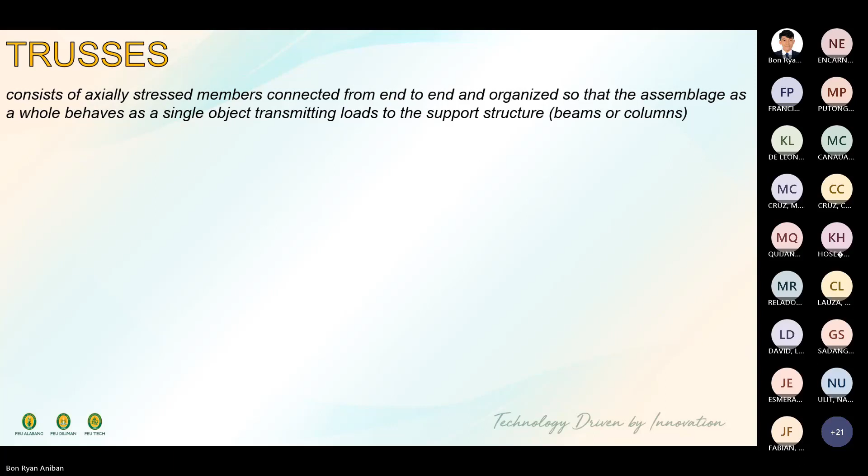Today we'll be discussing trusses. A truss consists of axially stressed members connected from end to end and organized so that the assemblage as a whole behaves as a single object, transmitting the loads to the support structure. It's either beams or columns.

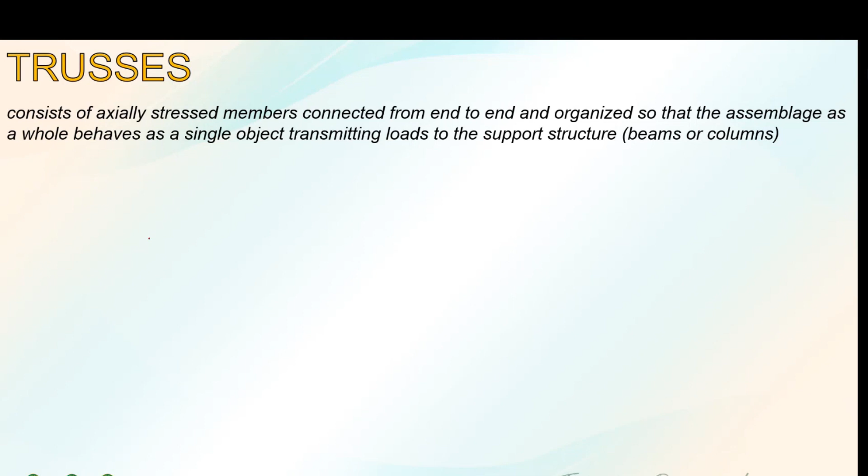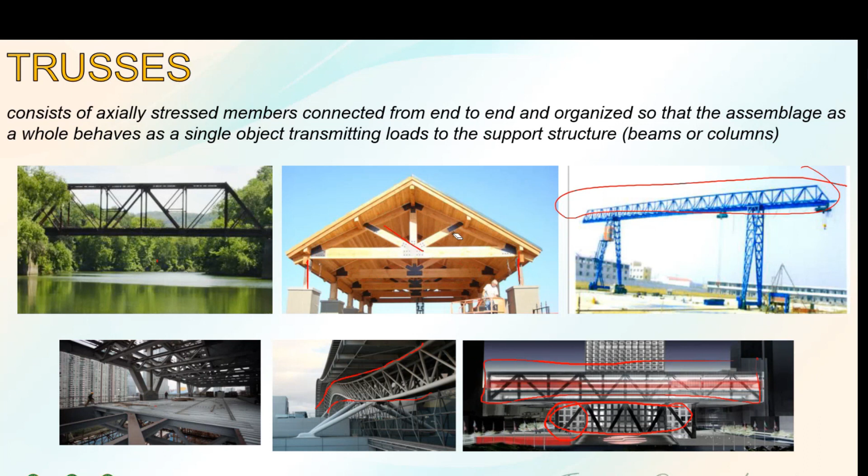Meaning, we are analyzing the truss with the load only doon sa mga joint. Dyan lang nag-a-act yung mga forces, sa mga joint lang. So, wala tayo ditong uniform load, walang distributed load. So, purely concentrated lang, acting on every joint. So, that's how we analyze trusses. Concentrated load lang.

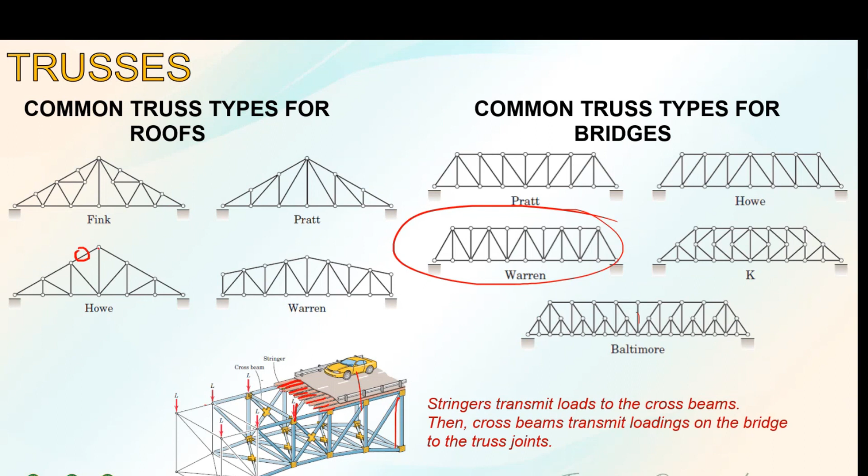However, a compressive force is directed towards the joint. Towards the joint yung direction ng force. It causes shortening of the member. Okay, tandaan na papunta lagi sa joint yung force.

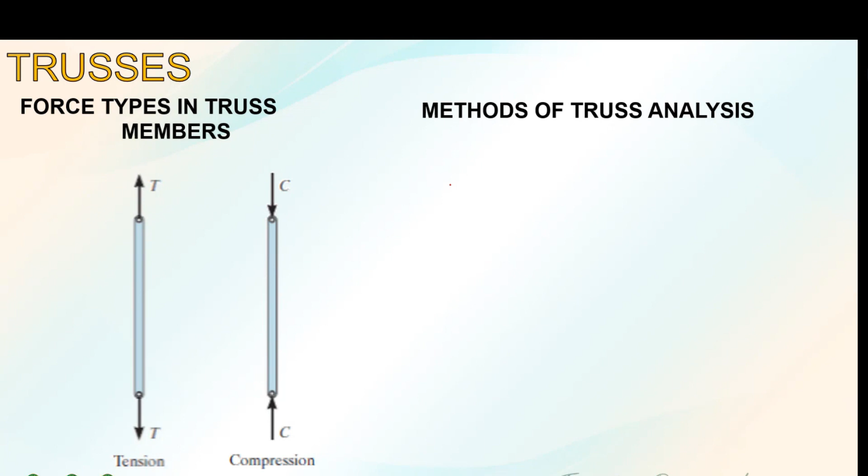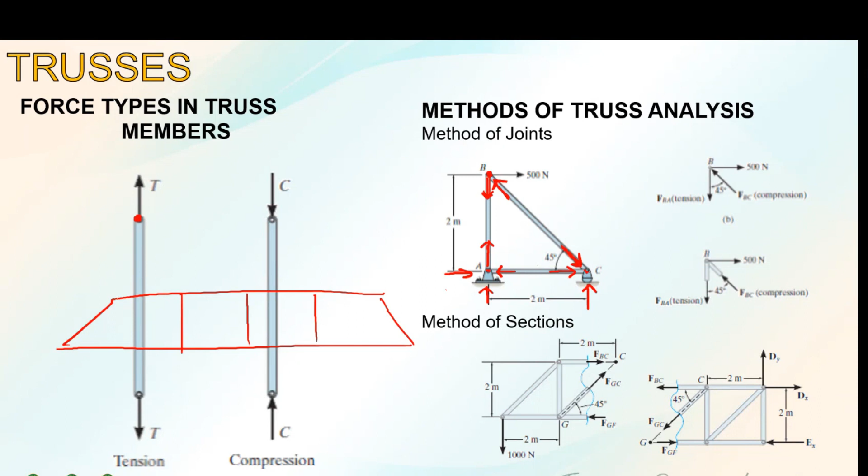We also have a method of sections. So method of sections, you are cutting the section. Let's say you have here a very long truss. So what's the purpose of method of sections? Method of joints will allow you to solve all member forces. Halimbawa, you want to identify member BC, member AB, and member AC. Kasi lahat ng joint ay dadaanan mo.

Okay, however, if you only want to solve a certain member, for example, ito lang ang gusto mo ma-solve, what you are going to do is cut the section along that. Ayan, ikakat mo yun. Kung saan ka nag-cut, yun lang yung mga lalabas na forces. Let's say dito ka lang nag-cut, ito lang yung mga lalabas na forces. You assume, so ganito naman, class, yung direction ng tension or compression. Let's say this is the cutting section.

If the force is away from the cutting section, so doon ka nakatingin sa cutting section, class, that is a tension. If the force is away from the cutting section, this is also a tension. If the force is towards the cutting section, that is a compressive force. So we have two methods to analyze the member forces on each member. But we will only focus on method of joints. So method of joints lang tayo mag-focus muna for this meeting.

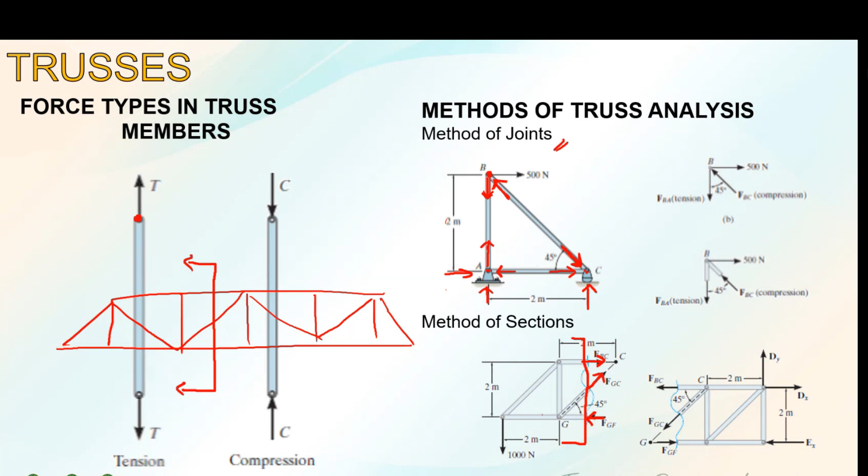Therefore, kapag pinat mo yan dyan, sa point na yan, walang moment. So end-to-end walang moment. Kung end-to-end ng bakal mo ay walang moment, walang moment dito, therefore yung buong length niya ay wala ring moment. Walang moment din itong bakal na to. As you try to cut the section, no moment acts at the end supports. It only consists entirely of two-force members. Hence, the members are always axially loaded. It only consists of two forces, vertical and horizontal component.

However, hindi tayo ganyan mag-analyze sa trusses. Dapat member forces. Gagamitin natin yung resultant. Yung resultant ng vertical at horizontal component is acting parallel doon mismo sa member. Andito yung mga forces natin. So, the force is only acting along the length of the member. They might be tension or compression. So, it can contain zero force members. Possible yung ina-analyze natin ay zero force member, walang load na kinukuha. Halimbawa ito, walang load, zero lang yung force dyan.

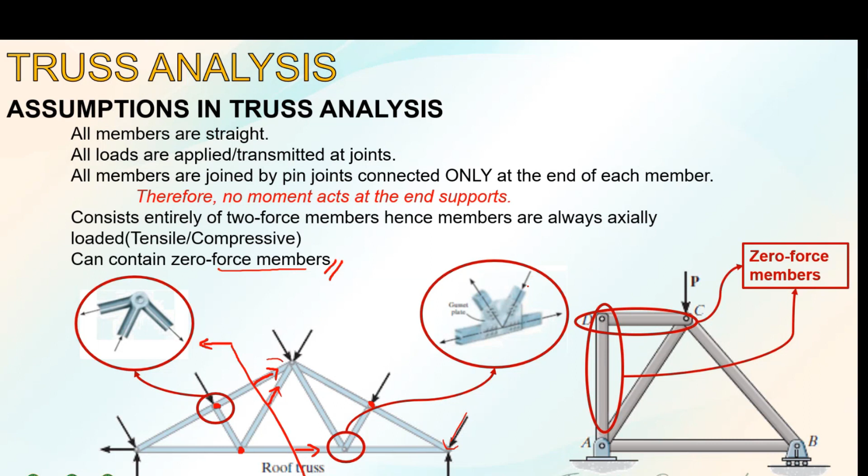So, paano natin malalaman? Without solving, malalaman natin, class, yung zero force member by just looking at the structure. Dito sa figure na to, itong dalawa tsaka ito are zero force members. So paano kaya nalaman yan? And then what's the purpose of identifying which are zero force members? Ano ba yung purpose nun?

Ang purpose ng zero force member, class, is to reduce the number of unknowns. For example, we want to identify all of the member forces. Ano yung member force ni AB? Ni AF? Alamin natin yan. Instead of solving all of those member forces, just look at our structure. Baka may zero force member, automatic alam mo na agad yung sagot, zero. Halimbawa, determine the member force EF. Kung zero force member siya, zero na sagot mo. So can we identify that? Zero force member: two members meeting at an unloaded joint. Joint ang tawag natin dito, class.

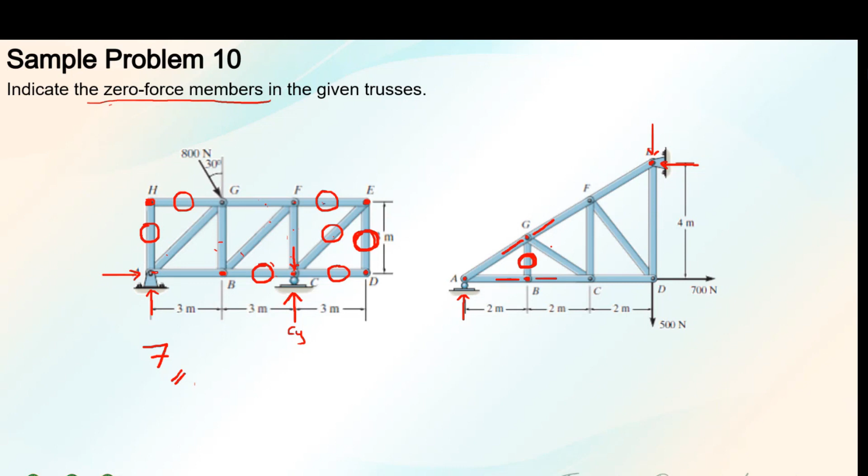Asan pa yung mga collinear? Okay, may collinear din dito class. Itong force GA and force GF. Since itong third member niya ay pangatlo na siya, hindi na pang-apat, dahil zero na ito. So, parang wala lang tong GB. Okay, we can just treat it equal to zero.

Okay, so at joint G, tatlo na lang ang nakakonect dyan. Okay, so ito na lang ang nakakonect dyan. Isa, dalawa, tatlo. However, this is collinear. These forces are collinear, therefore, zero na ito.

At joint C tayo, at joint C. May collinear ulit, at may third member na nakakonect. Therefore, yung third member na yun is zero na. At joint F, may collinear ulit. Okay, yung third member, zero na yon.

Okay, so joint E kaya. Meron tong force dito, so wala tayong masi-zero dyan. Even point A, wala diyang masi-zero, may dalawang nakakonect. Even point D, wala na rin diyang masi-zero. Pero ito zero na ito kanina. So, zero rin yan dito sa D. Okay, kung zero siya dito, zero rin yan dito. And for this, meron lang tayong apat na zero force members.

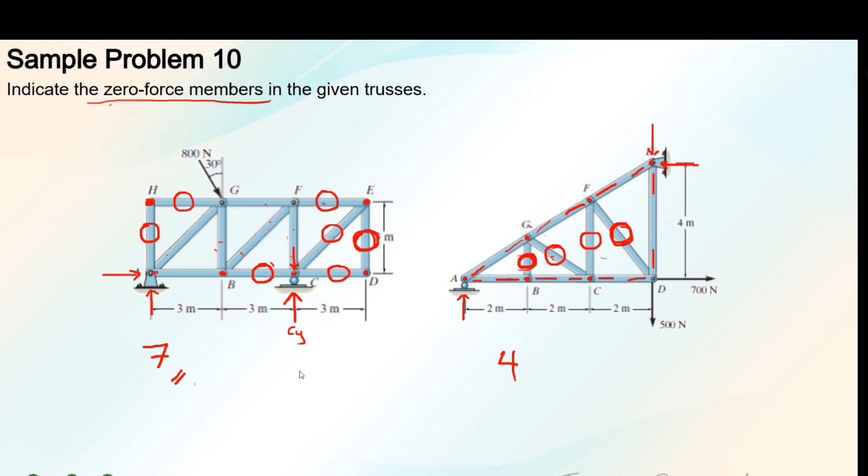Hindi man natin mag-analysis, no? We will first discuss yung mga first thing to do bago kayo mag-analyze. Una, dapat alam mo yung mga zero force member, and aside from that, you know the degree of indeterminacy or the statical determinacy of the trusses. So what do we mean by statical determinacy? Remember, nung nag-solve tayo ng beams, meron tayong cases kung saan dapat yung number of unknowns natin ay hanggang 3 lang kasi meron lang tayong 3 equilibrium equations.

Dapat 3 lang yung maximum unknown. Same din yan sa trusses. Okay? We can check kung kaya nating ma-solve yan. Kasi pagka sobrang dami ng unknown, even sa 3 equilibrium equations, we cannot solve yung support reactions sa trusses. Same thing doon sa trusses, no? If sobrang dami ng unknown, we cannot solve. So, paano natin malalaman kung solvable ba yung trusses na ibibigay sa atin?

So, we have 3 cases here. First is unstable, meaning magko-collapse yung structure, guguho. Indeterminate, stable ito, stable yung structure. However, sobrang dami ng unknown. Stable pa rin ito, determinate, pero...

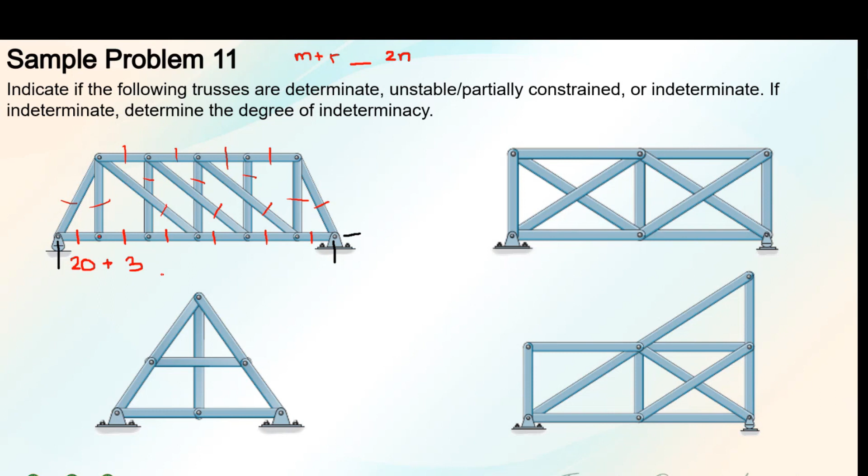Then we are going to compare that with 2 times the number of joints. Ilan ba yung joints? Kasama yung kung nasaan yung support. 1 to 12. Kung nasaan yung connections, those are joints. So we have a total of 12 joints.

And obviously, this is 23 less than 24. Therefore, this is what type of structure? That is unstable structure. Pag less than, unstable ang structure natin.

How about this one? Okay, let's try to solve this. Let's count the number of members. 1 to 8 members lang siya, kasi ito isa lang bilang isa lang din bilang nito. So 8 members, 8 plus the number of reactions.

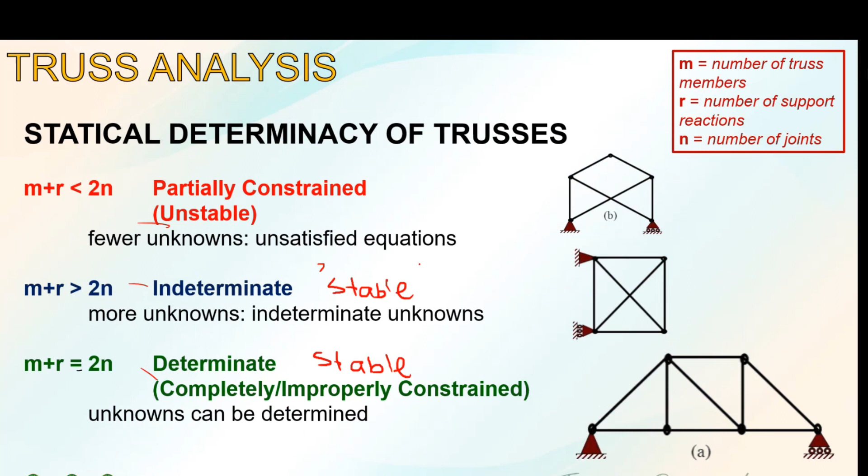Then we have to compare that with the number of joints, 2 times the number of joints. So we have 1 to 6. So that is 2 times 6. So this is 14, greater than 12. So pagka mas malaki, yung M plus R compared to 2 times the number of joints, that is indeterminate structure.

Indeterminate. Pero may kadugtong yan, class. So we have to tell the degree of indeterminacy, kung gaano siya kataas, yung additional unknown. So to identify the degree of indeterminacy, ima-minus mo lang yung right minus left, yung R plus M minus 2N. So that is 2. 14 minus 12, indeterminate to the second degree.

How about this problem? Let's count the number of member. 1 to 12 members plus the number of reactions. So we have 1, 2, and then 3 reactions, so supports.

And then we have to equate that to 2 times the number of joints. So 1 to 7 joints. So 2 times 7. So this is 15, greater than 14. So this is statically indeterminate to the first degree, kasi 15 minus 14. Indeterminate to the first degree.

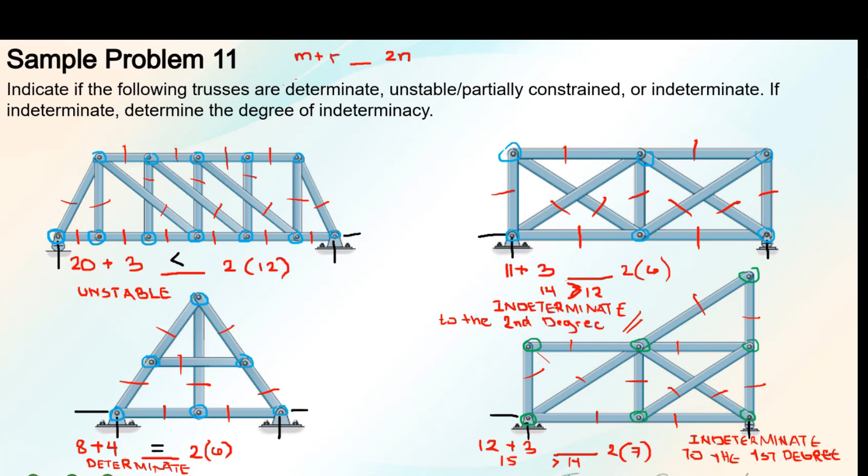Anyway, before we solve, let me introduce to you a simply supported truss. A simply supported truss is mainly used for roofs. Simply supported siya. Ang support niya sa kabila ay roller, sa kabila naman ay hinge. Okay, roller and a hinge support.

So, why roller? Bakit hindi both hinge? Roller support, class, para if that is a roller support, we allow the member to move horizontally. And ang purpose niyan class, para hindi ito nagba-buckle. Kasi class, during the increment of heat, the member, especially for steel, will elongate.

Hahaba siya. Now, if it is restrained horizontally, hindi siya makakahaba, ang tanging magagawa lang ng member mo ay mag-buckle. And we don't allow truss members to buckle. So, dapat straight lang sila. So, that's why this is simply supported, roller and hinge. Para nakaka-move yung support doon.

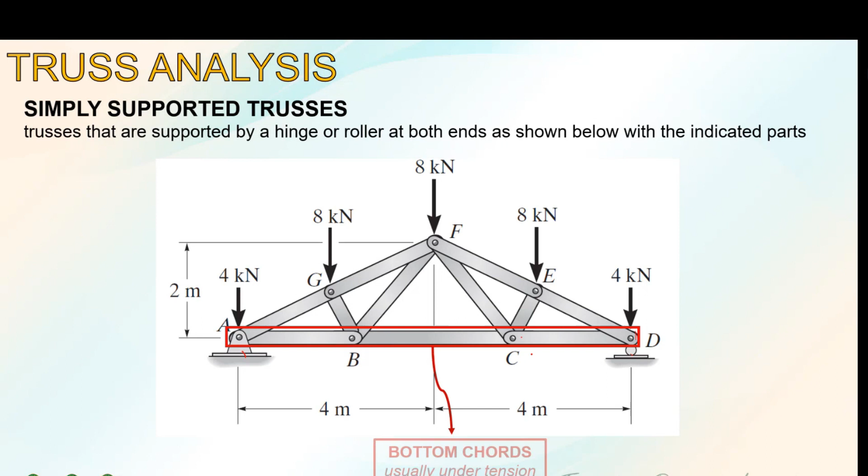And ano yung meron sa isang simply supported truss? Meron tayong tinatawag na bottom chord. This bottom chord is usually under tension. Kasi during analysis class, you have to identify the direction of the member forces. Halimbawa at joint A, anong direction ng force nito? Since this is a bottom chord, that is a tension force.

BC is also tension force. At joint C, tension to, tension din to. At joint D, ang member CD ay tension. So lahat ng nasa bottom chord ay tension. How about ito? Ang tawag naman dito is top chord. Top chord, usually under compression.

When you say compressive force, towards the joint yan. As we try to use the method of joints, these forces are towards the joint, towards the joint, and towards the joint. Kasi under compression, yung mga member dapat towards the joint.

Next is etong member na 'to. Ito naman ay tinatawag na middle chords. We're not sure kung anong direction yan, whether it might be in tension or compression. We're not sure kung ano ba talaga ang direction ng force na yan. However, malalaman naman natin yan during the analysis. So we will identify the direction of the force.

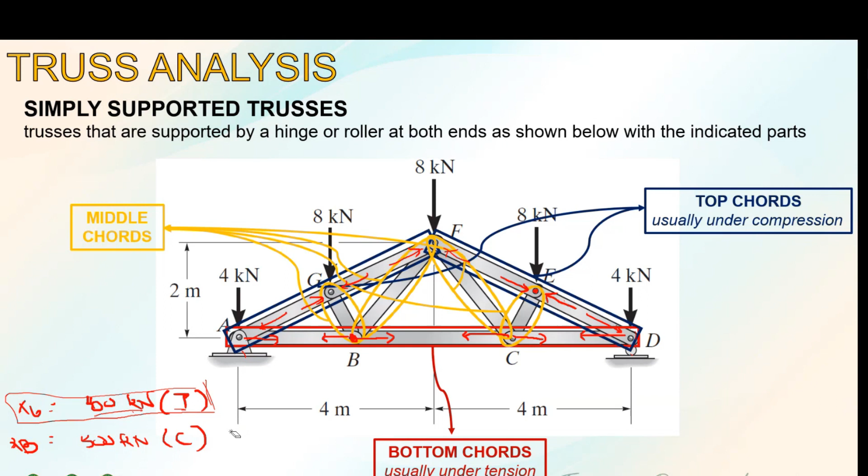Because the member forces must be analyzed properly if it is tension or compression. Kasi class, magkaiba ang design procedure ng isang tension force member at saka compressive force member. Sa steel design, magkaiba ang ina-analyze. So, magkaibang ide-design yan, tension at saka compression.

Here is the analysis of truss using the method of joints. Here is the procedure. First is to solve for the support reactions. Pero unahin muna natin dito, class, yung degree of indeterminacy. Gusto ko isosolve nyo muna kung unstable ba siya, determinate, or indeterminate. Solve muna si degree of indeterminacy. Baka kasi matrap kayo.

Sir, in determining the degree of indeterminacy, should we account for the zero force member or hindi na po? Hindi pa. So, dapat una muna si degree of indeterminacy. Wala siyang kinalaman pa si zero force member. Hindi pa natin kukunin yung zero force member. Tama ba yung sagot ko? Okay, so mamaya maintindihan natin yung process.

So next is to solve the support reactions, then draw the free body diagram of each joint. Pero bago ka mag-drawing ng free body diagram sa bawat joint, isingit mo dito, class, yung zero force member. Alamin mo kung sino yung mga zero force member bago ka mag-drawing ng mga free body diagram, para umonti yung mga forces at every joint.

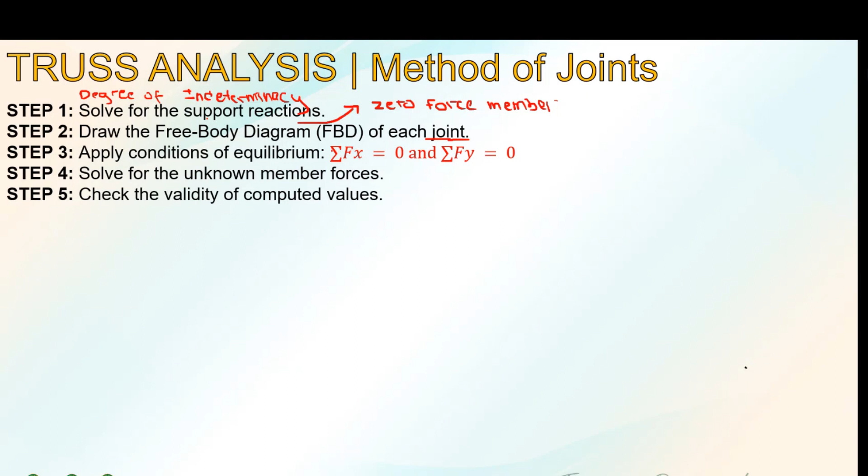Then apply the equations of equilibrium. We can only use summation of forces in x and y, just like what we've done sa cable. Dalawa lang yung equation na ginagamit natin sa cable, 'di ba? At every joint. Actually, method of joints talaga yung ginawa natin sa cable. We analyze every joint. Solve the unknown member forces and check the validity of the computed values.

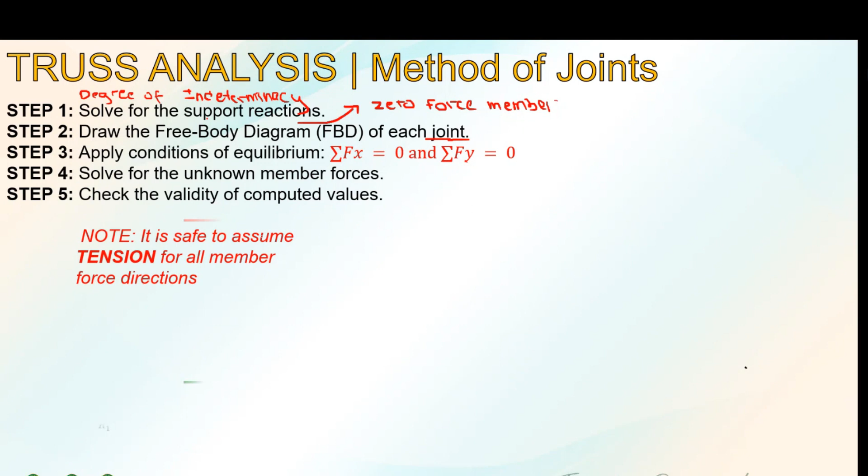So let's start. Here there's a note: it is safe to assume that the tension for all members, for all directions, are in tension. When we say tension, away from the joint. Okay, so it is safe to assume. But class, this is what we'll do. For this discussion, our assumption is fine. So we will just look at the structure. By summing forces vertical and horizontal, we can easily identify the direction of that force. Okay?

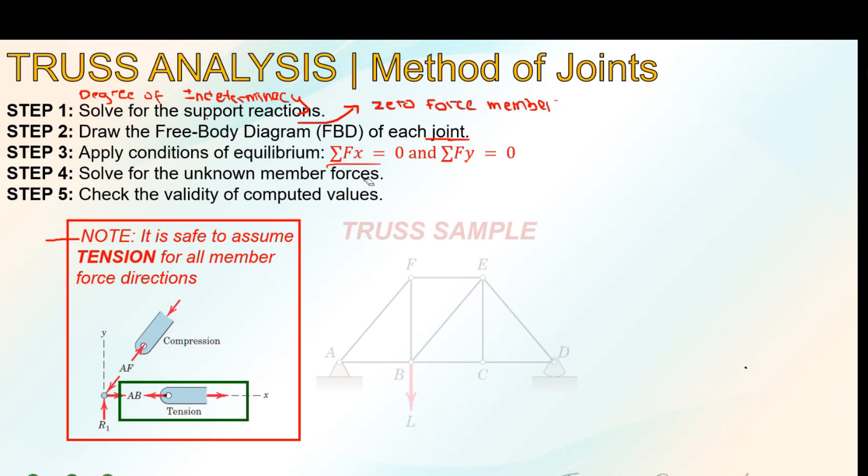Truss sample, let's say this one. Okay. Let's say we will try to draw the free body diagram of each joint. Of course, first is to solve the degree of indeterminacy. M plus R must be less than 2J. For this case, R here is 3. Members here are 1, 2, 3, 4, 5, 6, 7, 8, 9, which is less than 2 times the number of joints. Or equal to, sorry.

So it's determinate. Because if it's unstable, we don't solve. We stop if it's unstable. But if greater than, we stop too, because there are many unknowns there. So we only solve determinate. So number of joints, 1, 2, 3, 4, 5, 6. 6. So obviously that is equal, 12 is equal to 12. Determinate. Next is to identify the zero force member so there are fewer unknowns.

Okay. So look for a joint with only two connected. So far, none. Look for collinear members; the third one is 0. So that's the only zero force member here. And then you will now draw the free body diagram of each joint. So how to draw the free body diagram of each joint? Let's say your support reaction here is upward. Here it's upward too. Support reactions, draw the free body diagram.

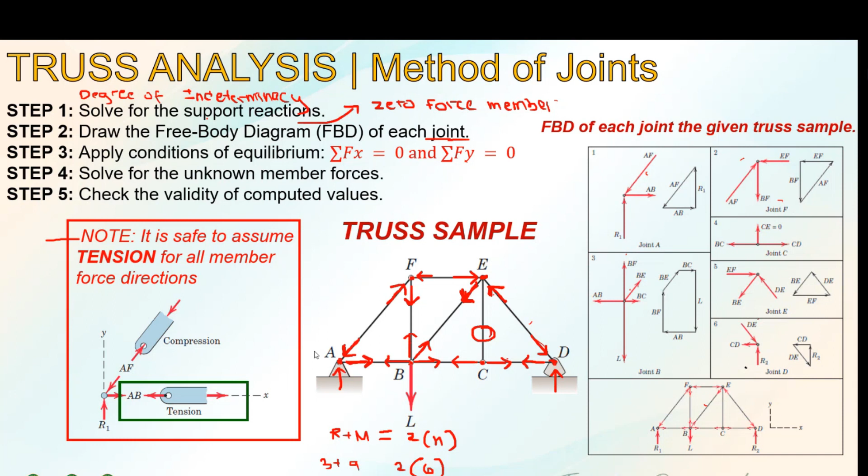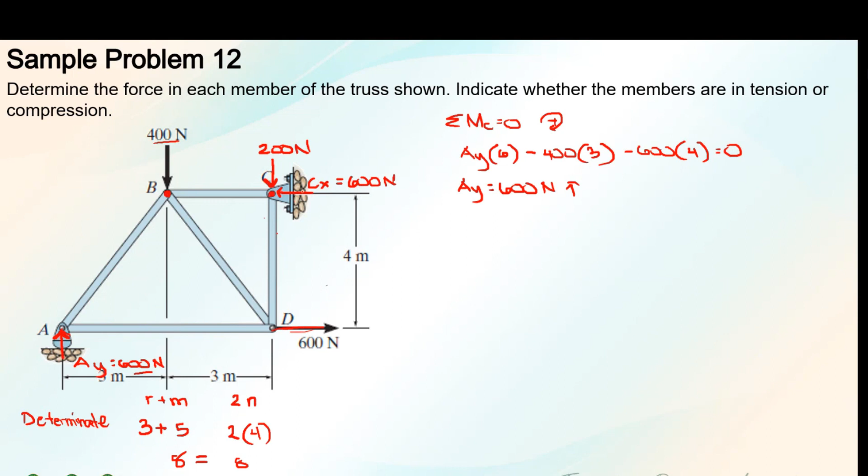So that's it. We now solved the reactions at the supports. Okay, so let's transfer them here. This is 600. Okay, this is downward 200. And then you have 600 upward here. We now use method of joints to identify the member forces. Okay, method of joints.

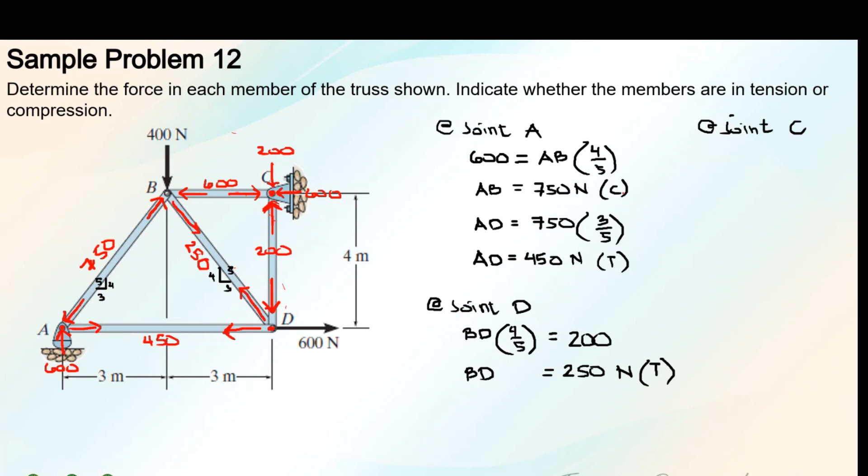Meron tayong AB, 750 newtons. Box lang natin. May AD, 450 newtons in tension. BD, 250 newtons in tension. And then, lagay na rin natin si BC dito. BC is 600 newtons in compression. Tapos CD, that is equal to 200 newtons in compression din. Okay, towards the joint.

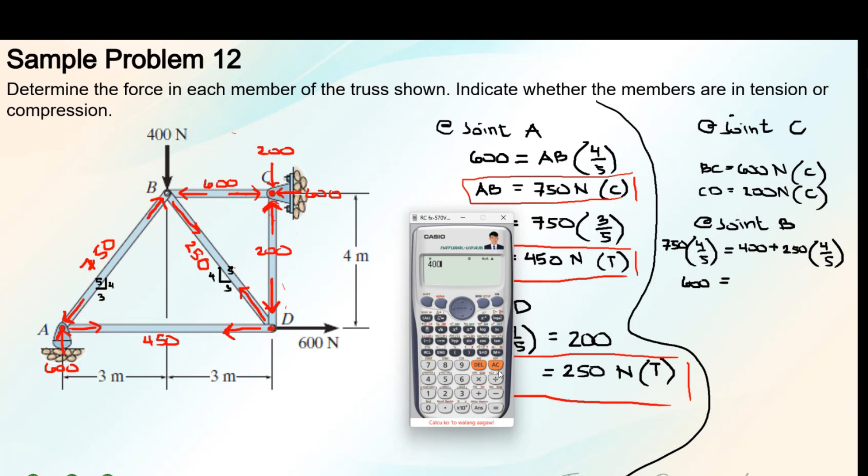Okay, equal yan sa, dapat 600 din yung kakalabasan ng kabila. 400 plus 250, so times 4/5. Equal yan sa 600 din. Therefore, tama yung ginawa natin.

Okay, so pwede pa nating i-check summing forces, vertical pa lang to, yung horizontal, how about the horizontal forces? Yung mga papunta sa right, 750, 3/5. Ano pa yung papunta sa right? Si 250 rin, papunta sa right, papunta sa right to direction niya. Ito rin papunta sa right, 3/5 din. Must be equal to the force going to the left. Itong 600 going to the left, 600. So, equate lang natin.

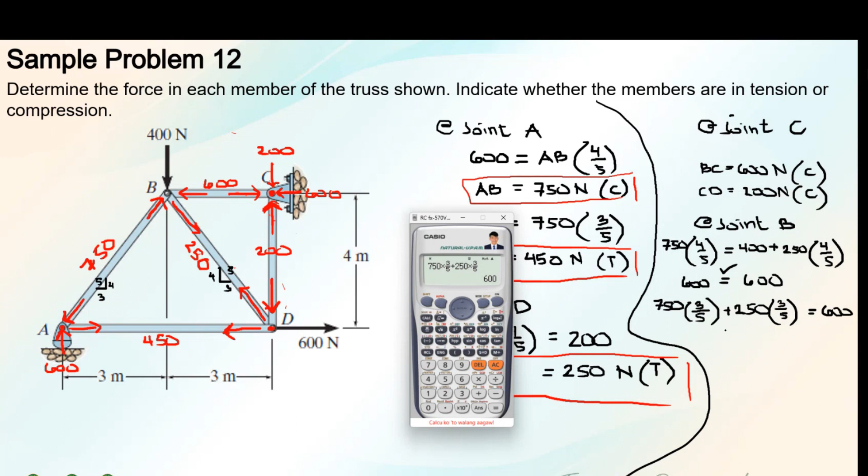Okay, dapat equal to sa 600, 750 times 3/5, plus 250 times 3/5, equal sa... oops, mali. Summing forces horizontal, 750, mali. Mali yung type ko. Okay, 600. So, tama. Okay, 600, summing forces horizontal, no? Equal to 600. So, check.

Ngayon, pag hindi nag-equal yan, class, layo ng left sa right side of the equation, yung summing forces vertical and horizontal, meaning there's something wrong doon sa mga na-solve mo previously. You have to recheck it. So dahil tama na yan, class, dahil na-check natin yung last joint, last joint mo class is pang check lang yan ng validity. Okay, so dapat daanan mo lahat ng joint class, ilista mo yung mga nagamit mo na joint, tsaka yung hindi pa. So dapat lahat daanan mo for method of joints, no? Kasi never kang magkakamali sa method of joints. Okay?

So that's the answer, no, for this problem, the force in each member of the truss. We were able to identify if that is tension or compression without assuming. Hindi tayo nag-assume ng direction dito, class, ha? Lahat ng direction dyan ay tama lahat. Okay, wala nang assumption of the direction.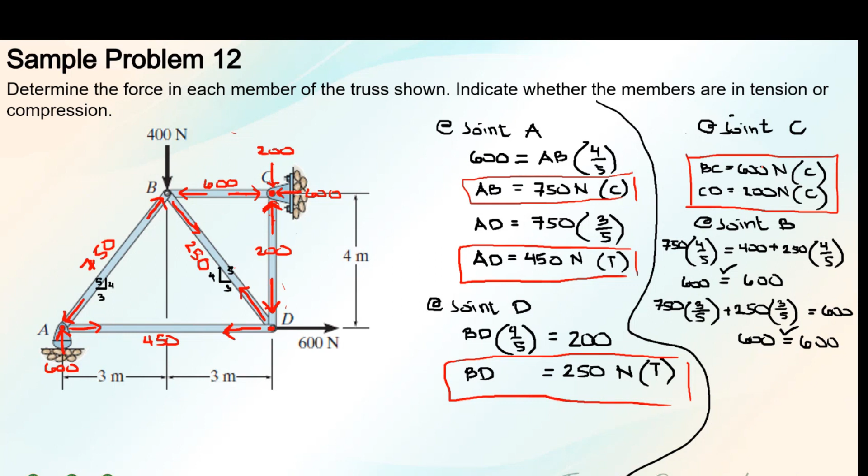Let's proceed to the next problem. Okay, so first thing to do is to identify the degree of indeterminacy, whether it is determinate, indeterminate, or unstable. So the formula is R plus M.

Okay, and then you have to compare to two times the number of joints, 2n. The number of reactions here is 3: 1, 2, and then 3 reactions, so supports. So you have 3 reactions. The number of members here is 1, 2, 3, 4, 5, 6, 7, 8, 9, 10, 11 members. And the number of joints are 1, 2, 3, 4, 5, 6, 7 joints. Again, 1, 2, 3, 4, 5, 6, 7 joints. So obviously, this is 14 is equal to 14.

This is the determinate structure. So therefore, we can solve the member forces, okay, at each joint. Before we solve the member forces, let's check first yung mga zero force member.

Okay? Check muna natin, o pwede rin naman mauna si reaction sa support. Okay? Pwede rin mauna si zero force member. It's up to you, pwede namang palitan yung dalawa na yun. Pero unahin muna natin yung zero force member. Okay, ito reaction dito vertical. Ito ay unahin muna natin si reaction sa support. Mamaya na lang yung zero force member.

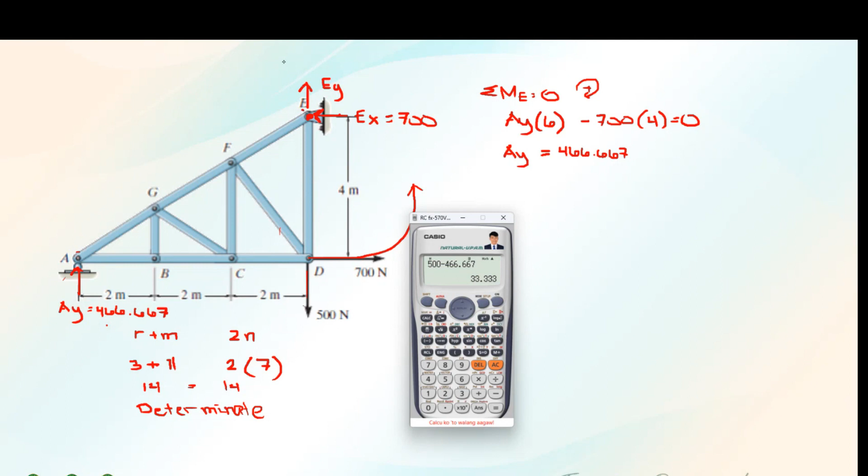Okay, 33.333. Yan, 33.333 newtons. Okay? And these are the forces on each member.

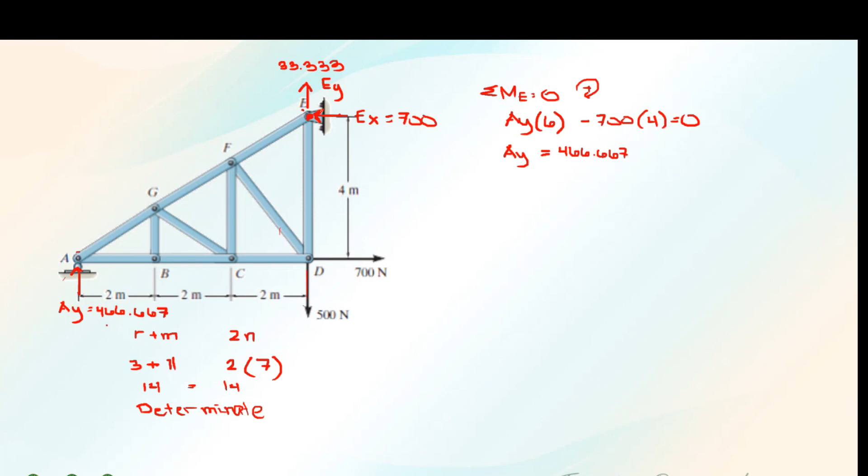So ayusin ko lang para malinis. Ito ay 466.667. Ito ay 700. Going to the left. Tapos ito ay upward na 33.333.

Okay? Now, before we draw the free body diagram, let us first identify the zero force member. Okay, zero force member. Draw the free body diagram of each joint, no? Kasi method of joint ang gamit natin.

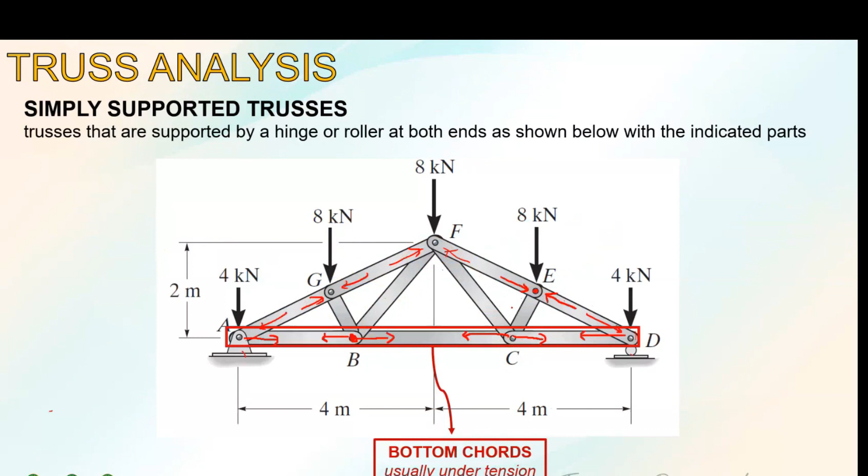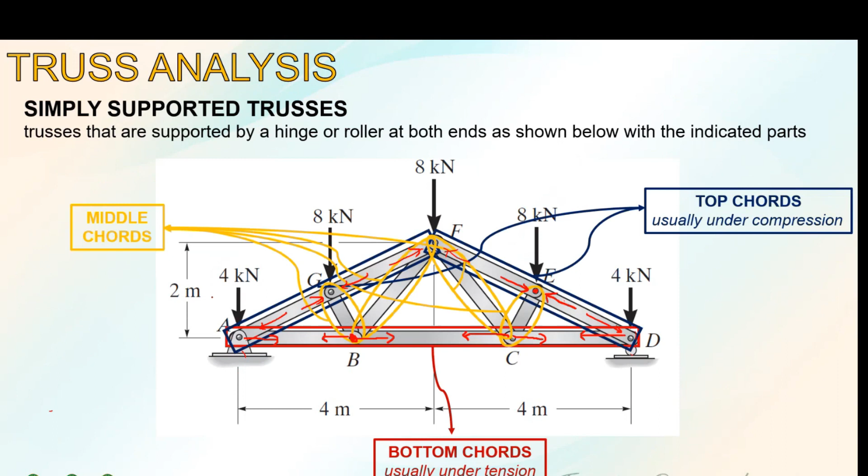Do we have any case 1 here? Case 1 is, ano nga yung case 1 natin? Sabi sa case 1, two members meeting at unloaded joint. Meron bang case 1 dito sa problem na to? Two members meeting at a joint, unloaded joint. Hindi pwede ito kasi may load dito. Considered as load. Two member meeting at joint, pero loaded yan. So far, wala tayong case 1.

How about case 2? Case 2 is collinear members, okay, may unloaded pa rin meeting at a joint and the third member is 0. So itong B na to, may collinear dyan forces, meeting at unloaded joint and the third member must be equal to 0. Hanap pa tayo ng collinear members na meeting at a single joint and the third member is 0.

Ito yung class, joint G, collinear ito at ang third member is 0. Joint C, collinear ito and the third member is 0. Third member na to, hindi na to pang fourth member kasi ito 0 na. 0 na to. So pangatlong member mo na lang siya ng collinear member na to.

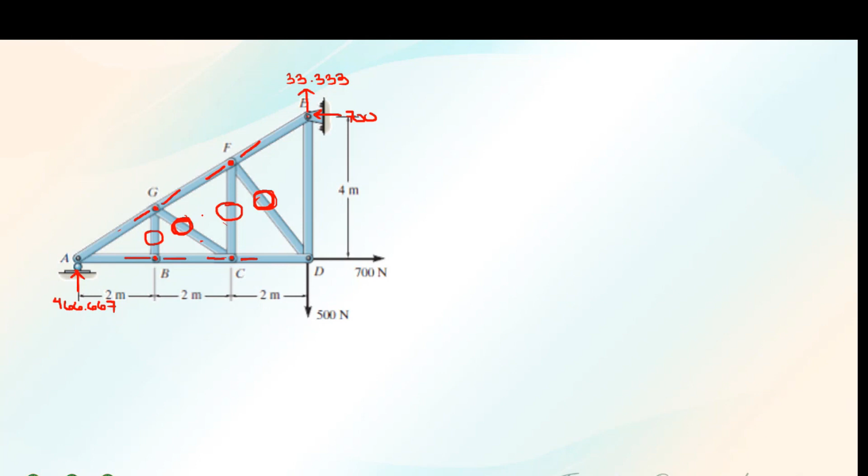Okay? Joint F. May collinear dito at yung third member mo ay 0. Again, this is considered as third member dahil yung FC ay 0. Parang wala na siya sa drawing. Isipin mo na wala na siya sa drawing. So wala na rin to sa figure. Isipin mo na wala tong nasa gitna na to. Okay? So parang for aesthetic purposes lang siya kasi wala naman talaga siyang force na dinudulot.

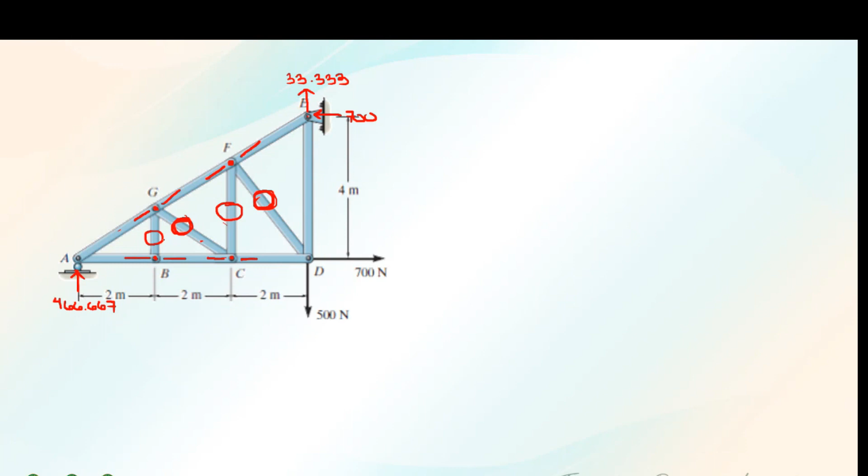Okay? This is just for stability. Yung purpose niyan is for stability lang and para hindi siya maging unstable. Kasi may hinge ka dito eh. Ayan. Pero kung straight bar to, isang buong straight bar, you can just remove this. Okay, bars. And that's it, no? Yan lang naman yung mga zero force member.

We can now proceed with analysis of or with identifying the force doon sa mga joint. Start tayo sa joint A kasi dalawang nakakonect dito, si AG at AB. Okay, upward yung force dito. So umpisahan na natin dito. Ano dapat direksyon nito, ng force na 'to?

So, it should be downward or upward? Kung may upward ka dito, it should be downward force. Yan, very good. Okay, kung ito ay dito naman tayo, ano kayang direksyon nito? Pupunta saan 'to? To the right, very good. So ayan, nalaman na natin yung mga direksyon.

Tingnan natin class, kung ito ay tension, tension din siya dito. Kung ito to the left, dapat ito to the right, naglalaban lang sila. Kung tension si BC, tension si BC, okay. Kung ito to the left, dalawa lang silang force, collinear sila. Ito going to the right. 'Di ba, mabilis nating nalaman yung mga direksyon. Si CD ay tension, tension din siya dito. Yun. Okay, so dito, compression si AG, compression din siya dito.

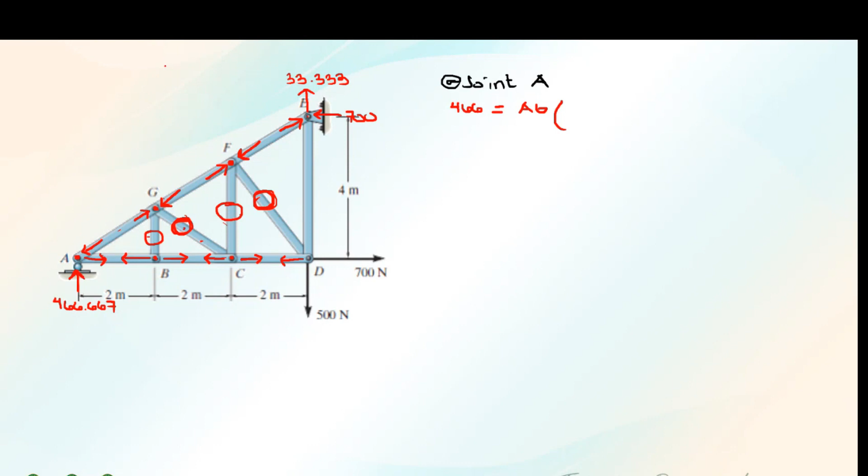Alamin muna natin yung slope. Tingnan na lang natin class yung buong length na to. Yung buong length niya ay, ang slope niyan is 4/6. Diba? Ang height nito is 4, ang length niya is 6. In lowest term, that is divide by 2, 2/3. So ito ay square root of, ano yan? Ang hypotenuse niya, square root of 13, tama ba? Square root of 13.